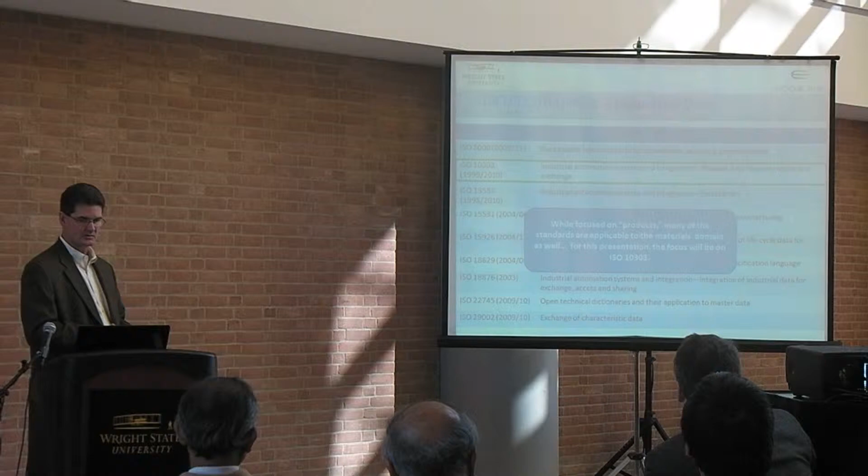The one we're going to focus on today is ISO 10303, which is Industrial Automation Systems and Integration, Product Data Representation and Exchange. I had an email exchange with Norman Swindells, who is close to this particular standard, and he indicated if you swap material for a product, you have a lot of the same technologies that would be applicable to the materials domain. And obviously, if you look at ISO 8000, right above that, it talks about data quality, provenance, accuracy, completeness, the sorts of things that we care about.

And the nice thing about standards is they basically embody a lot of knowledge. Basically, thousands of hours of people's time and energy and knowledge are captured in a lot of these standards. It's a matter of trying to figure out what you can extract that's applicable to today's problem.

I highlighted here what ISO 10303 is all about. It's a standard for computer interpretable representation and exchange of product manufacturing information, predominantly geared towards the CAD community and that sort of thing. But the focus was interoperability across all these different pieces of equipment, software applications that dealt with product data. And again, replace product data with material, and at least a lot of the content associated with this would be applicable to materials.

And if we look at ISO 10303 Part 45, it deals specifically with material properties. And then Part 235 deals with an application protocol for materials information for the design and verification of products. Now, ISO 10303 came out, I think, first in 1994. And this was involved a little bit later. I'm not exactly sure what time, but they definitely got involved in the late 90s.

And then there was an activity that started around 2009 called Future STEP. And it looks like it was an activity geared towards modernizing this particular standard, which has, frankly, hundreds of parts associated with it. And the modernization included trying to express things in a different way, trying to utilize some of the semantic web technologies that are currently in place and have matured over the last 14 years or so.

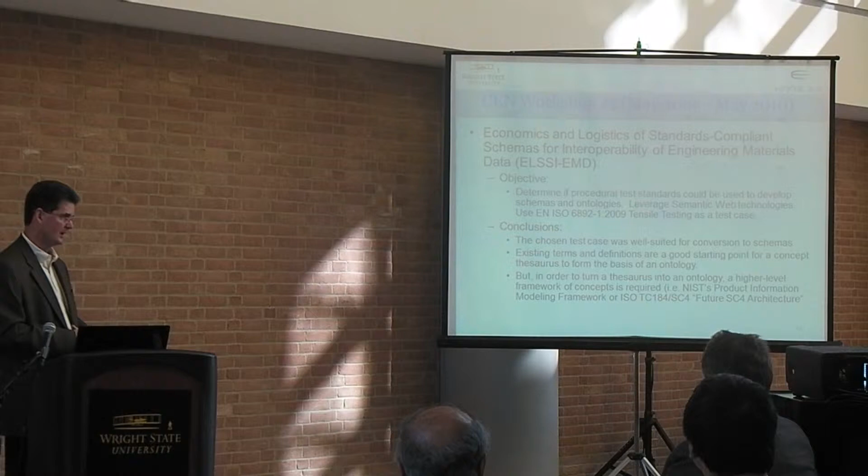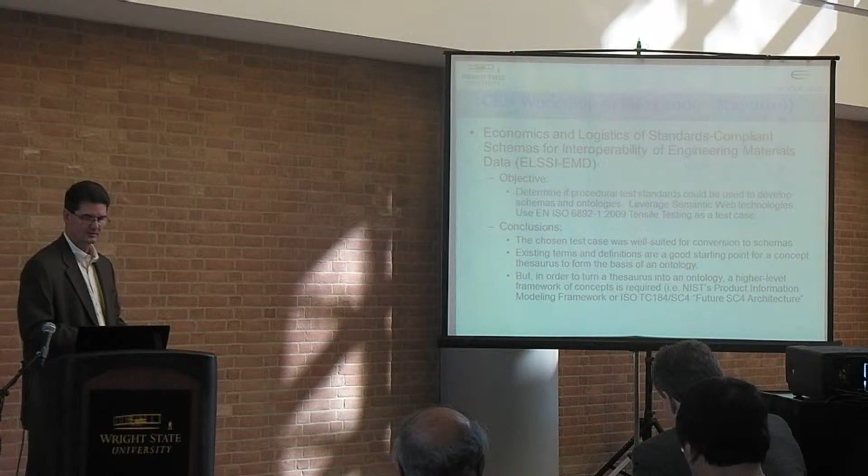Now if we move to a different standards body, the European standards, they had a workshop, and their workshop is typically 6, 8 experts that work for a certain period of time, 16 months, 21 months, that sort of thing. So in this case it was 12 months. This was a workshop that they put together because they wanted to focus on interoperability of engineering materials data.

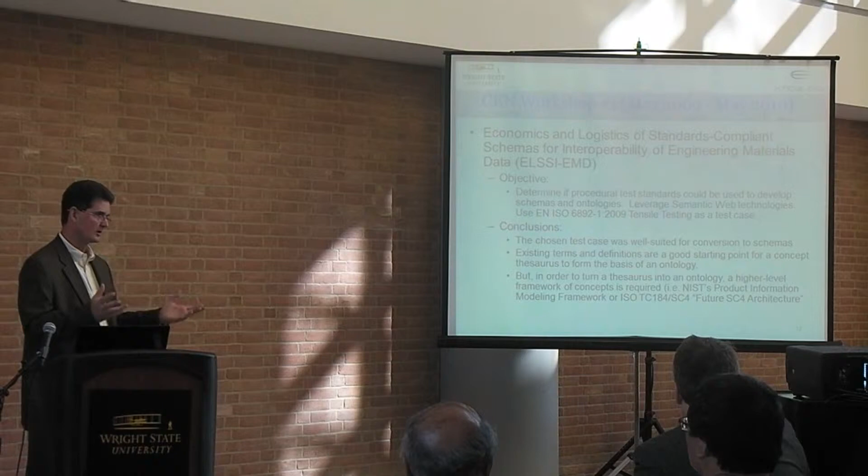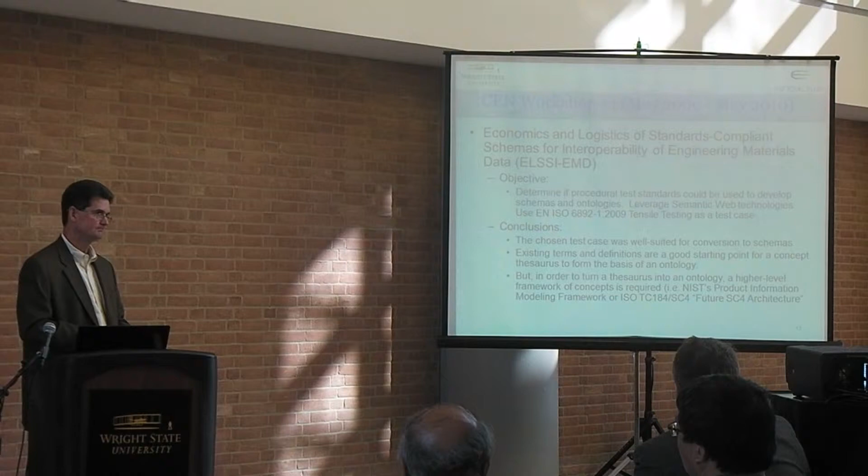So it's materials data, and they want to be able to flow this materials data from application to application without regard to what the application is. And when I say application, I'm talking about software application. It could be an MTS control software for an MTS frame. It could be putting materials data into a finite element model. It could be a model that predicts the residual strength associated with a damaged composite or the failure mode of a damaged composite. It doesn't matter what it is.

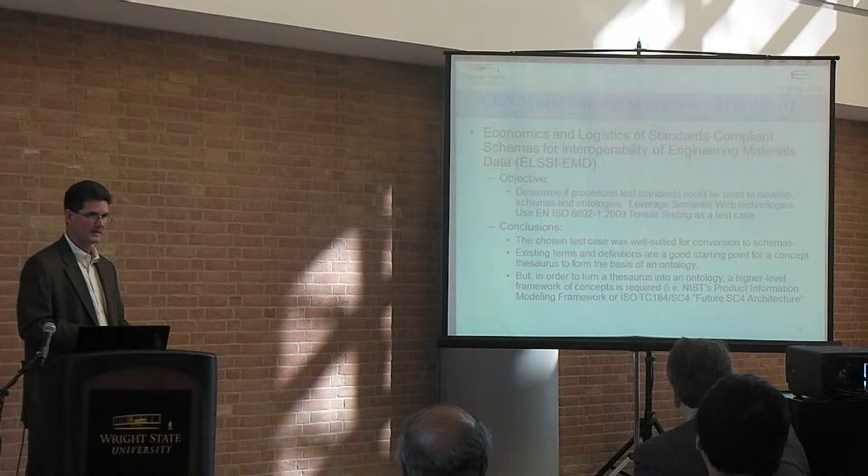And they decided to go about it by looking at the standards that are currently out there for ISO for mechanical testing, and to see if they could develop ontologies and some other things relative to those particular standards. And so they chose one associated with tensile testing out of ISO, and sure enough, they said it's well suited for schemas, but that wasn't a surprise. It already had CSV files that could be associated with it. The existing terms and definitions associated with that standard, so we're back to vocabularies and definitions.

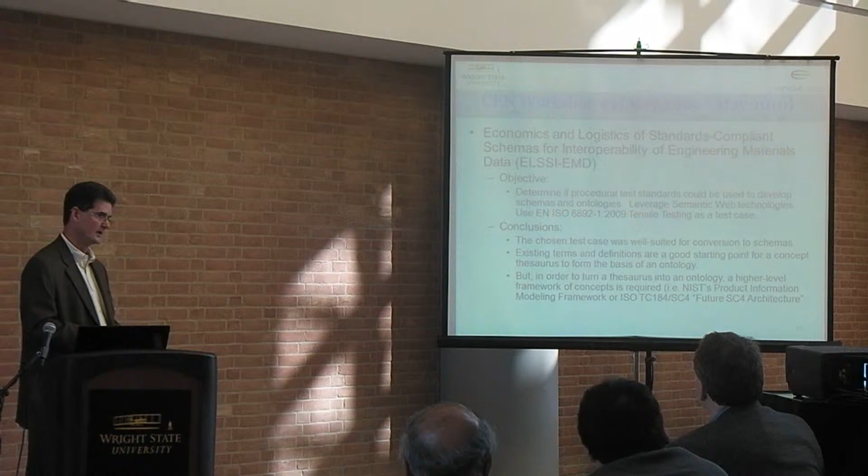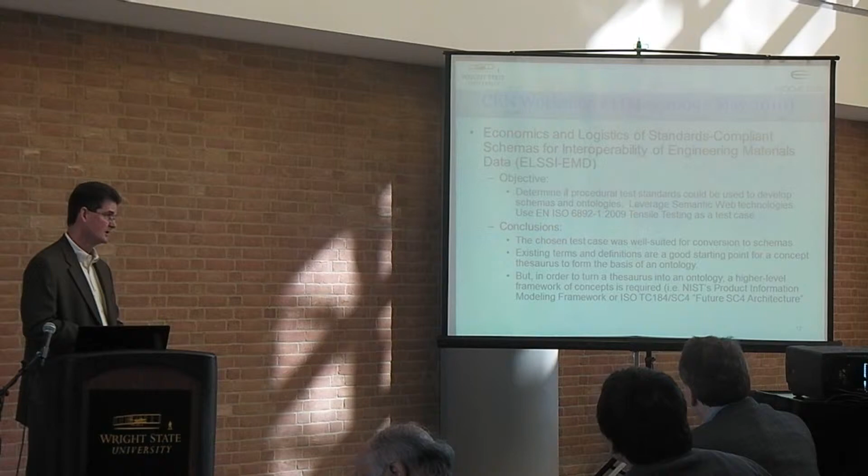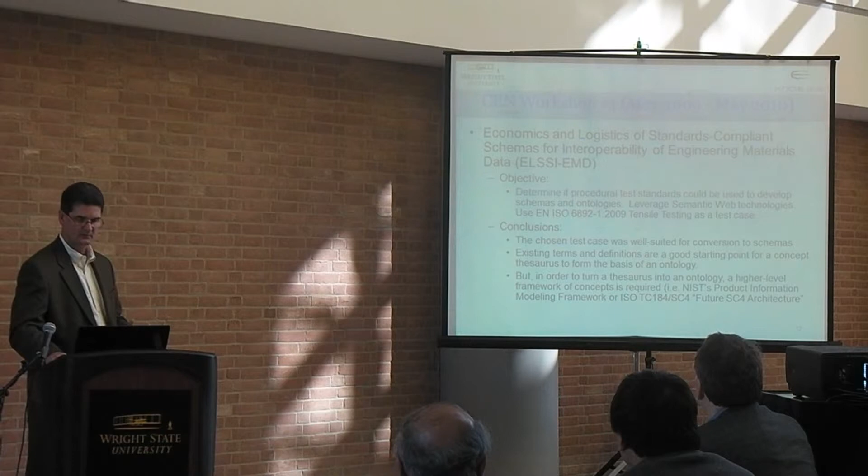It was a good place to start for a concept thesaurus, which is, again, just a list of terms that maybe were synonyms or terms that are the same as one another. But in order to turn the thesaurus into an ontology, a higher level framework needed to be put in place. And so it was either that ISO framework, for example, or something associated with NIST's product information modeling framework, but some other framework needed to be put in place to really make this come to life.

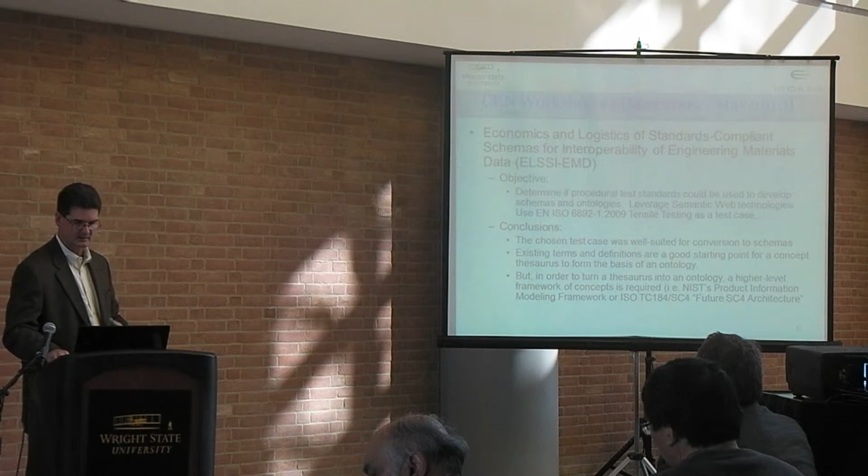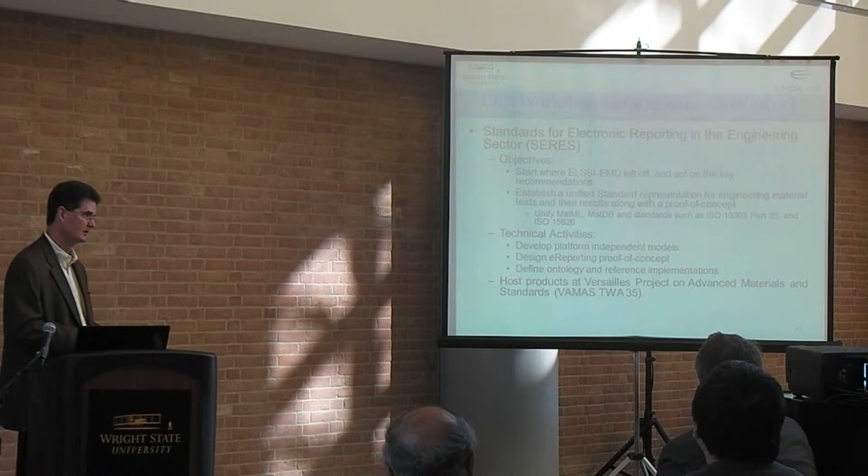And so they started a second workshop. In this case, it was a 21-month workshop. It was going to end sometime this month, and they're going to come out with their report this month. If you're a member, you'll get to kind of see the report before it goes public. But this will begin to show some of the results associated with that activity.

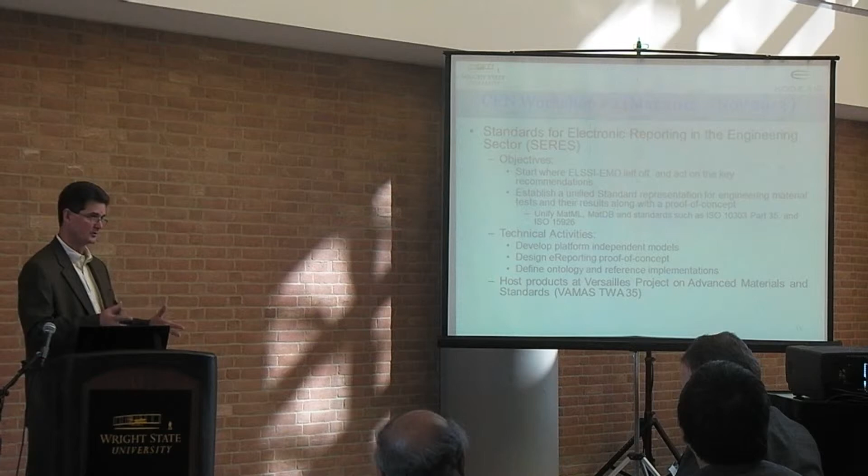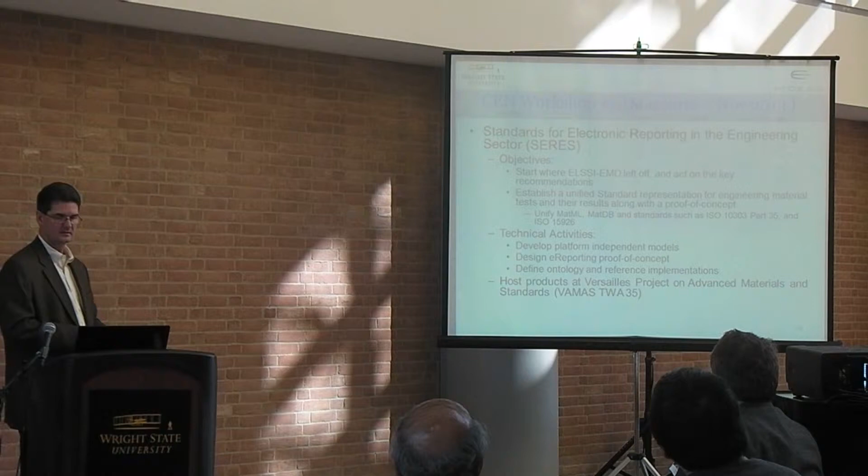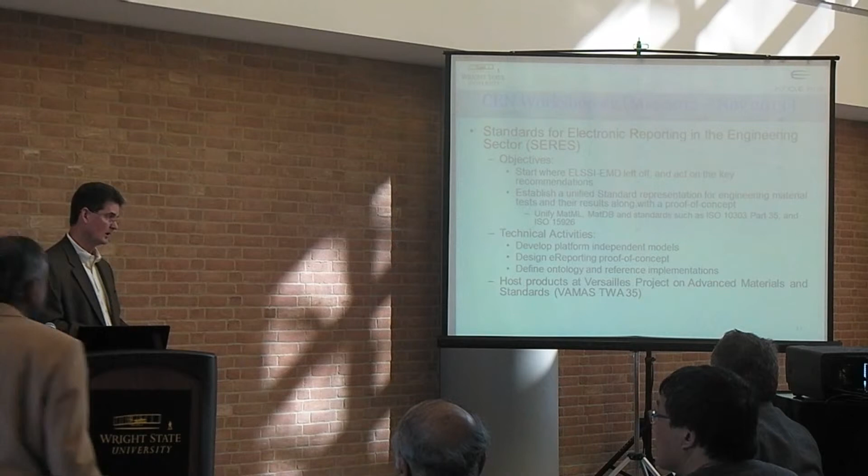So their objectives were to start where the last workshop left off and establish a unified standard representation for engineering material tests and their results, along with a proof of concept. All right, show me that this thing works. And so they have to host it somewhere. They're going to host it, it looks like, at a technical working activity. That didn't sound right, but it's basically a group of folks, number 35, that are associated with materials representation. And what I believe is going to be hosted there will be a vocabulary.

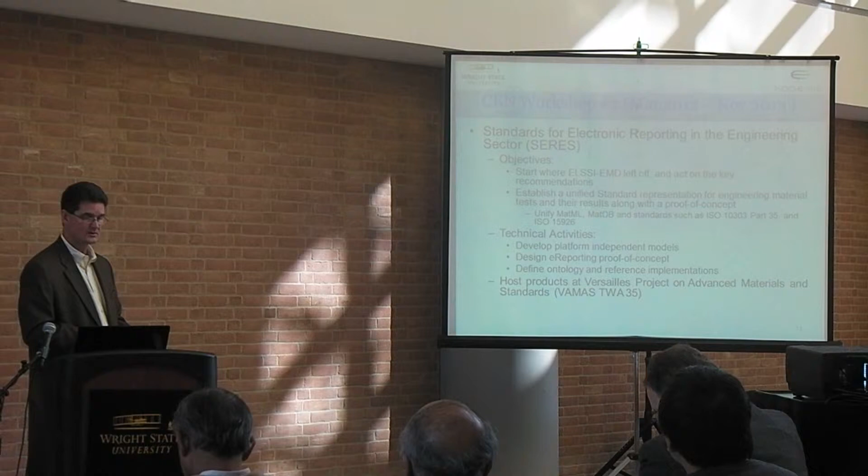We've already exchanged some emails. Theirs is sort of expressed as spreadsheets. Ours will be RDF, but we'll exchange and kind of put them both in both places. They want to design, define an ontology and reference implementations. A guy named David Leal, our ontologist, I think is also associated with the ISO

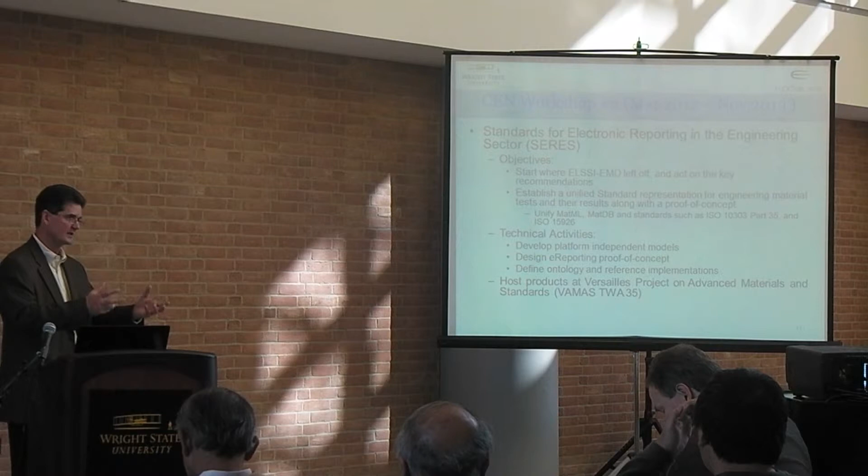standards body. So here you have two standards bodies going after the same objective, utilizing the same technology, W3C or semantic web technologies. So it kind of makes you think, well, maybe that's a direction that's valid. It doesn't totally validate what we're doing, but it's for sure not invalidating what we're doing. So we're going to work hopefully with those folks and continue to push this forward.

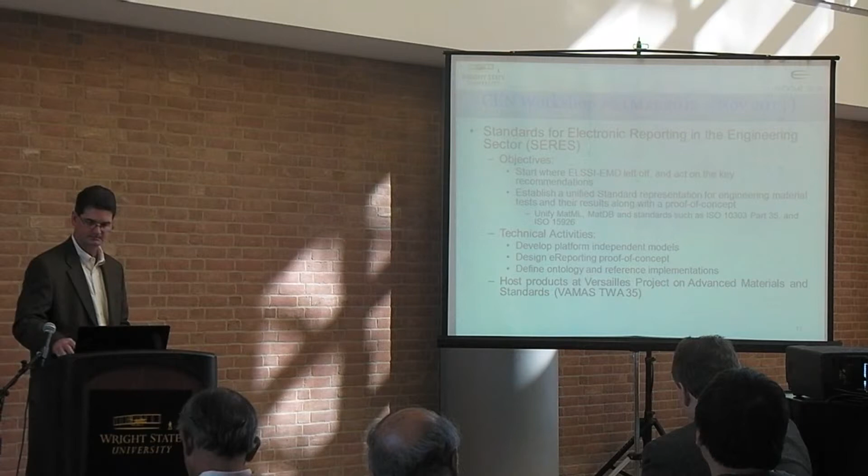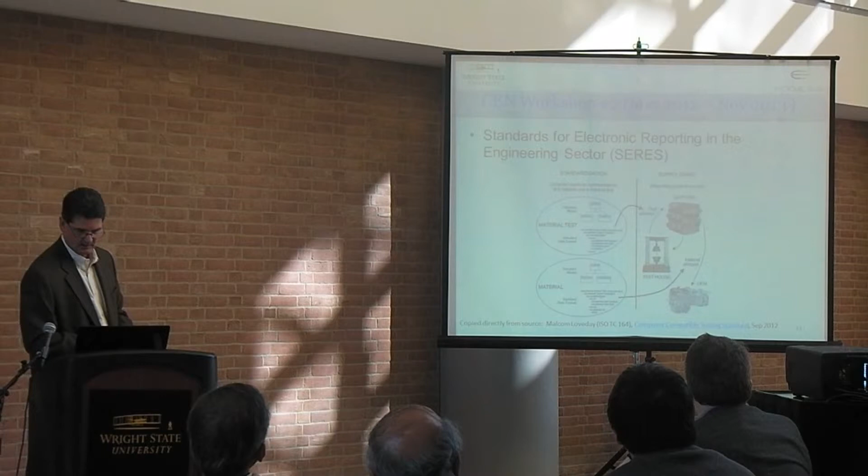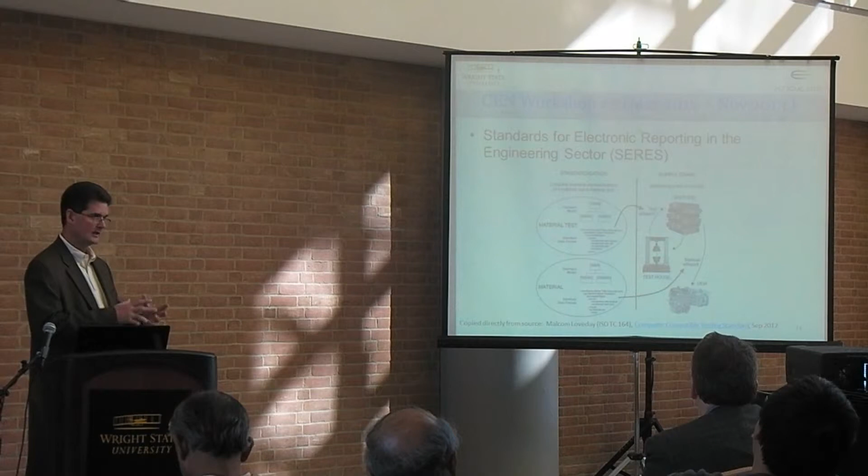And this is sort of an example of what they envision for SERES. In this case, it shows a material test ontology, it shows material ontology, and then the flow of data. So in this particular case, you have a supplier flowing some data to a test house, flowing that data back to the supplier, flowing that data to the OEM, and it's transparent. The passage of information in the background is transparent.

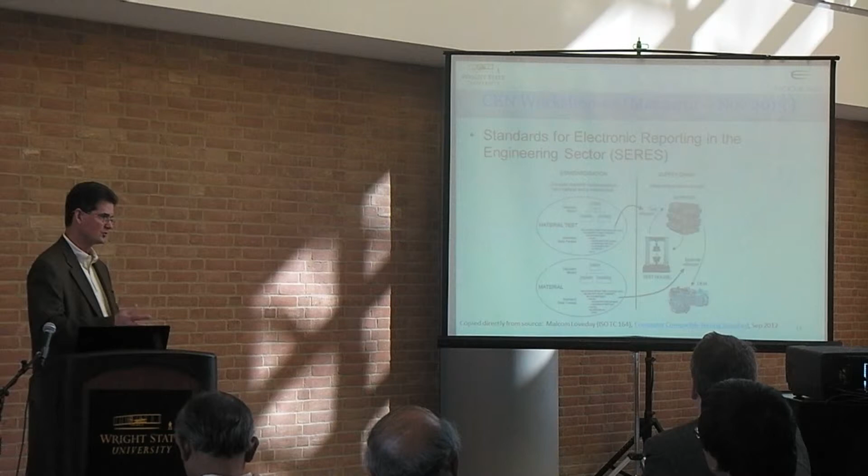There's no ETL, extract, transform, and load, right? There's none of that. There's no special procedures that have to be written. I mean, that's the vision here anyway. So all that wasted effort and frustration that typically goes with moving data from A to B to C begins to go away.

And what I want to do is just kind of throw this in here real quick. You know, there is no such thing as original thought anymore. I sort of came up with this triplets concept, and I patted myself on the back. That's pretty original, right? And then I looked at Mil Handbook 17, and Mil Handbook 17 says raw materials, manufacturing product, finished product, right?

It's the same thing as what I have here, which is, in my case, materials products are subjected to a process which yields a higher value product. It really isn't anything special. But as I started to look at these standards and talk to other folks, what began to emerge was that it seemed to be a common foundational concept.

And as a matter of fact, after speaking with David Leal, he said before they created hierarchies or taxonomies and that sort of thing, and I hope I'm not putting words into his mouth, they focused on that top process, right, that top box in the chart, which is basically the same thing. You have a process, you have a product going into the process, you have a product coming out.

If we look at one of the standards, ISO 10303, Part 235, it really is basically the same thing. You have a process operation. So you have a process value, a process operation, and yield is produced to the product value. So people have thought about this. They've developed data models around this. So there's got to be something in these standards, something in these workshops, the CEN workshops, that are relevant to what we're doing.

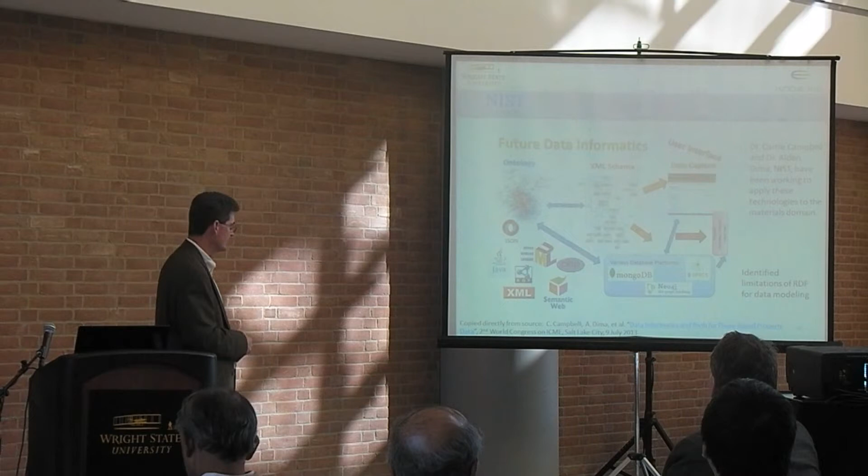But if you look at this, you see a lot of the sorts of things that we've been talking about. We have the ontologies, and this is the semantic web, the W3C that's associated with it. They moved off RDF. My understanding is there were some limitations associated with it. And I can truly appreciate that, just from the little bit of time that we've worked with it.

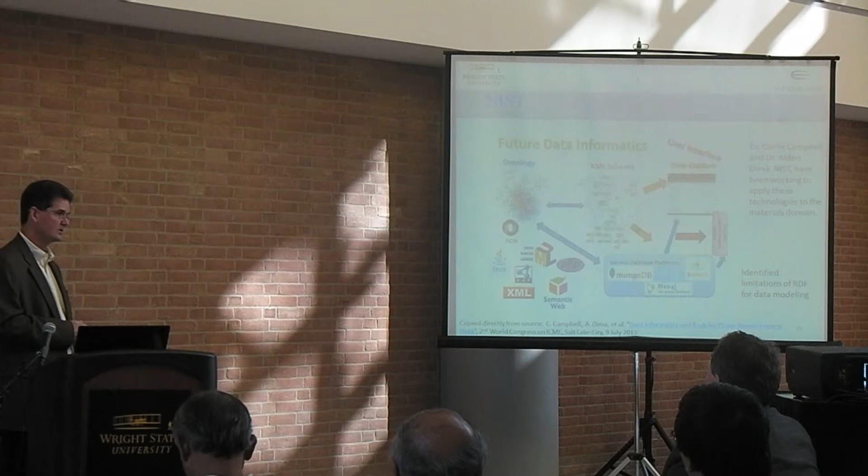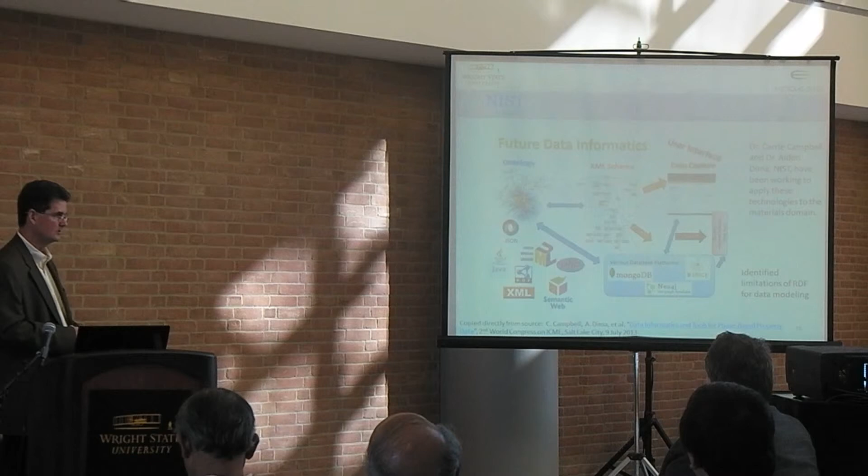I can say something like porosity decreases strength. That's a great relationship that can be captured in an ontology. But if you want to go beyond something that's binary, it's very difficult. You have to spend some time really thinking about it in order to try to cast it into an RDF, which is a binary relationship. So I believe that's one of the reasons that they moved into other data models, graph-based data models that don't have that limitation.

So as I was talking to somebody in the break here, NIST, they're focused on CalPhad and metals, and they're going deep. And my sense is, it's geared more towards the fundamental science. It's not a complete truism, but it's kind of going in that direction, right? But if they go outside of the current standards suite that are available for semantic web technologies, that makes adoption by others a little bit more difficult. It solves the problem, though, of being able to create these very expressive relationships between all these materials concepts: materials parameters, materials phenomena, materials facts, etc.

On the other hand, I kind of think I'm putting on my engineering hat over here and saying, okay, we have W3C, it's mature. Maybe there's still a lot of value to be had by utilizing those tools for a lot of our material information. Not all of it, not all the relationships. We can't express the relationships as richly as we would like to, maybe using OWL. Maybe there's enough there such that there's value to be had. And everything I've seen today makes me think that that's the case.

But I would kind of put that more toward the engineering side. And maybe it's not going to be able to go deep into the fundamental science side. But that's kind of speculation, and ignorance, not having very much knowledge about some of these capabilities.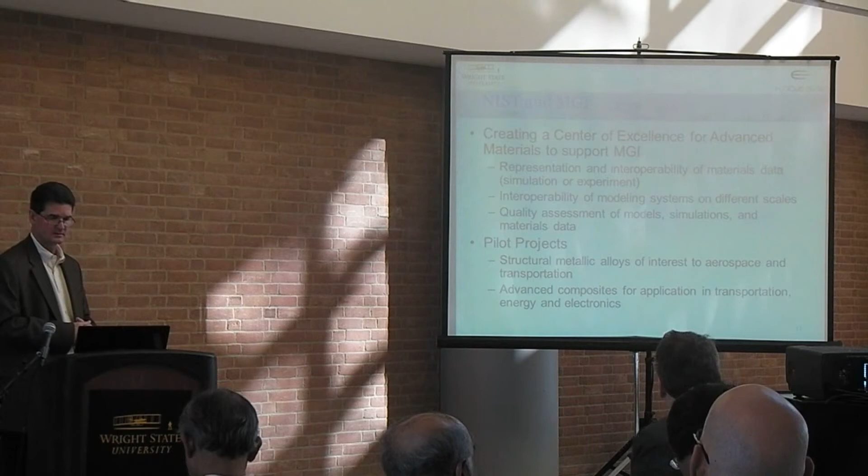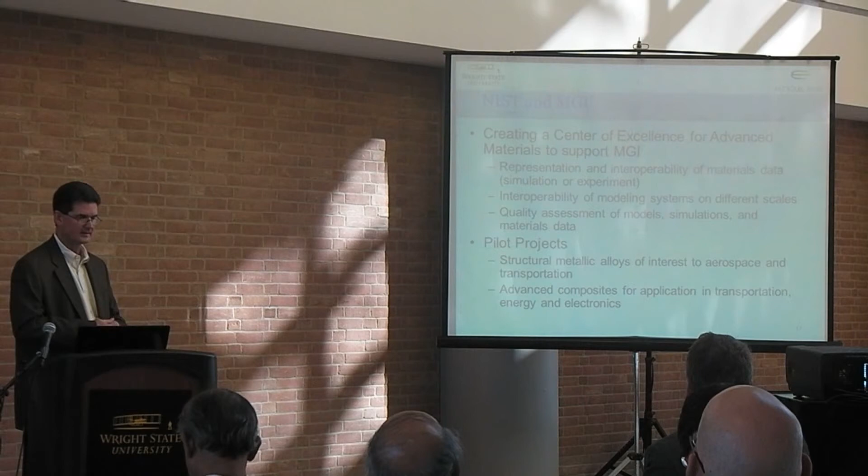The other thing that's pretty great that's going on out there is, I believe, this. I've seen spreadsheets. I haven't followed up with anybody to see if this is the case. But they have basically a center of excellence, and they've been funded, I think it's around $14, $15 million for advanced materials to support MGI. And they want to come up with representation and interoperability of materials data. They want to be able to have interoperability of systems at different scales, so different time scales, different length scales, nanometer versus millimeter, that kind of thing for length scales. And then quality assessment of models, simulations, and materials data. And they have 2 pilots that are associated with that.

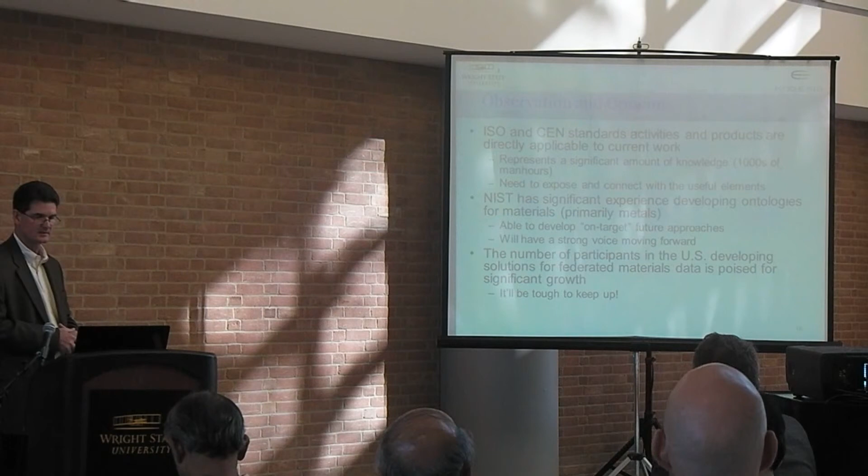So, final slide, observation and opinion. I think that there's something in the ISO and CEN standards that bear further work to look at, because I think there's just a lot of knowledge that's captured by those guys. NIST has significant experience in developing ontologies for materials, and they're taking a grander stage, as it were, because of the MGI initiatives. And I think they're probably able to develop on-target future approaches. Whereas, if you're just starting out, learning how to put this thing together, you're going to make a lot of the same mistakes. So go talk to them and figure out exactly what they've done. And I think they're going to have a strong voice moving forward.

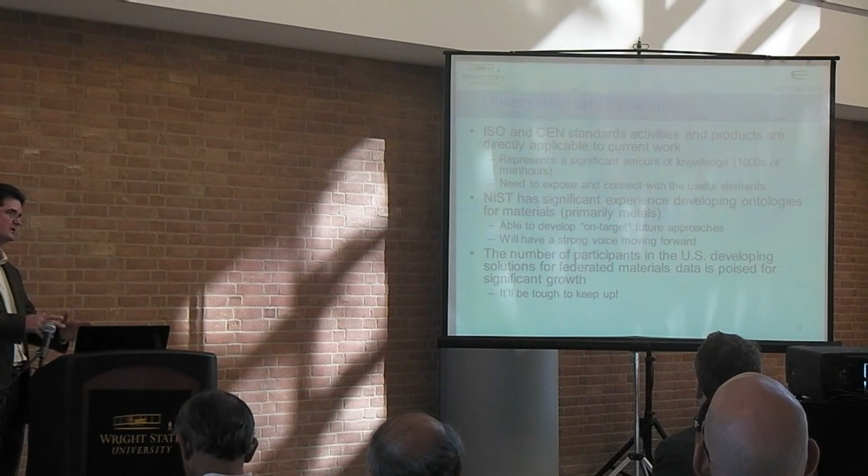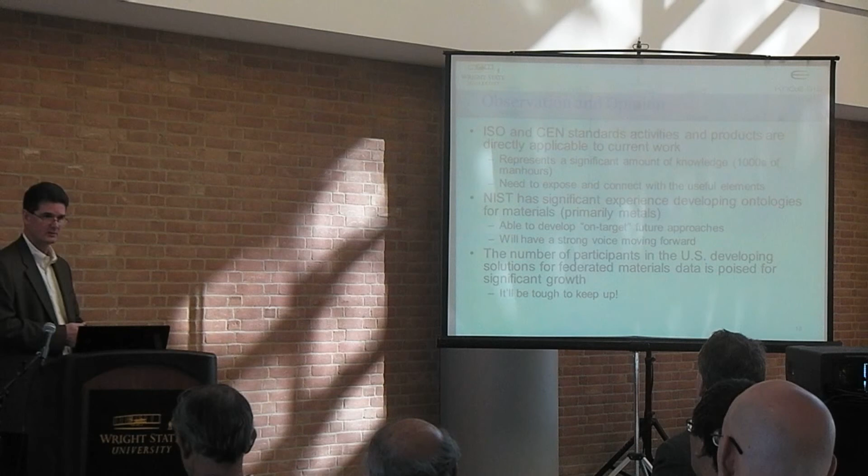And the number of participants in the U.S. developing solutions for federated materials data, I think, is poised for significant growth, simply because there's a lot of resources that are starting to go into this, and the contracts and so forth are just beginning to catch up. We have an SBIR that was just awarded, so there's 3 phase ones. This is kind of what we're doing. We have a center of excellence. I think that was $500K per year for each of the participants, ourselves and Wright State University. We got a couple of efforts focused on ICMSE. Terry Wong is associated with one of those in handling sort of the data architecture and so forth.

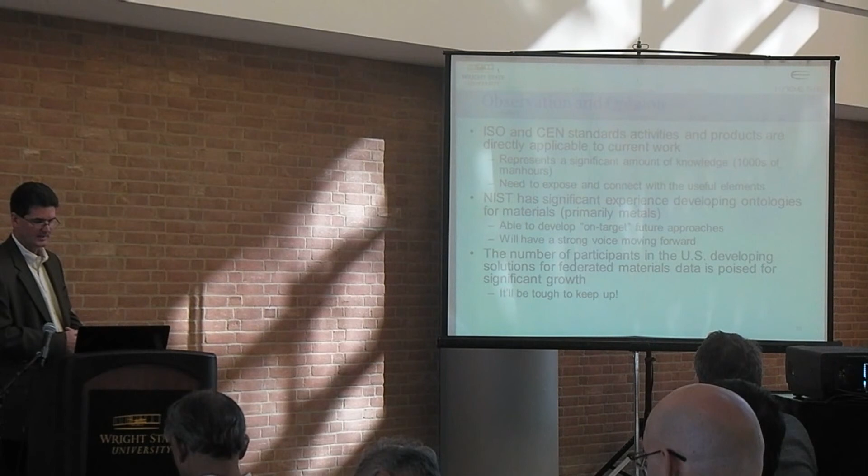So we have things that are either directly addressing materials data and interoperability, or we have things that are nibbling on the edges and using different technologies, which is legitimate. We have to do a comparison as time goes on, understand the pros and cons in order to enable ICMSE. But I have a feeling it's going to be kind of tough to keep up with everything that's about to happen in the area of federated materials and interoperability.

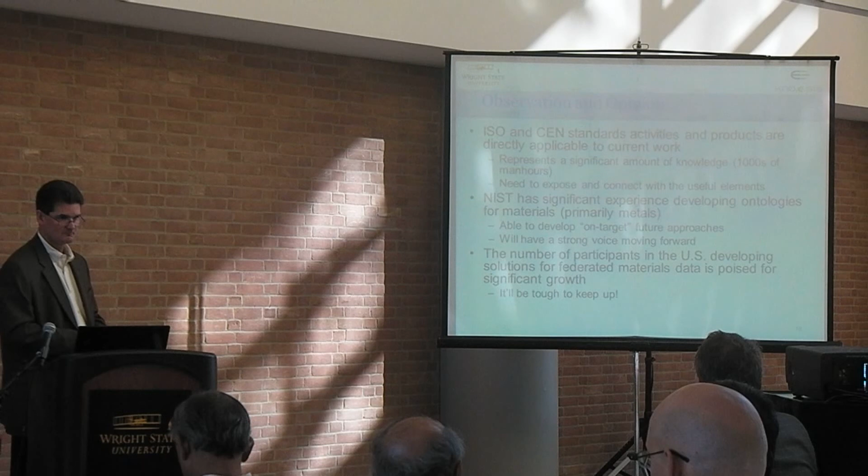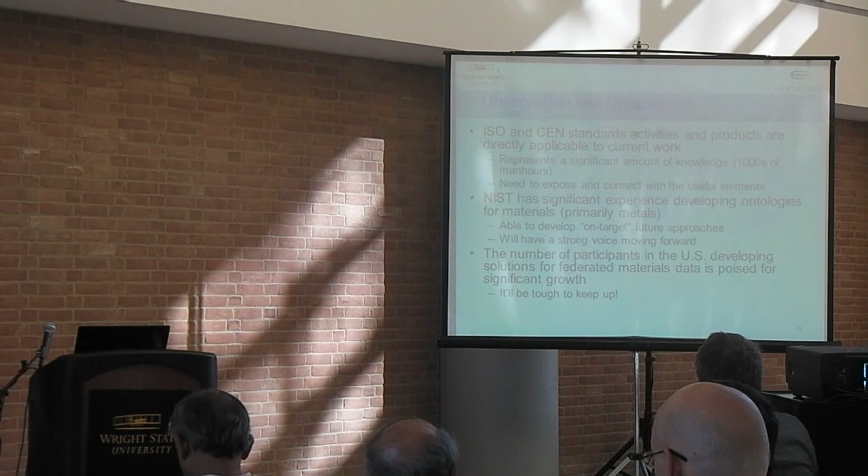Next, for going into the different breakout sections: technology gets adopted and tested out, like stress testing, to find out where it breaks and where it can excel.